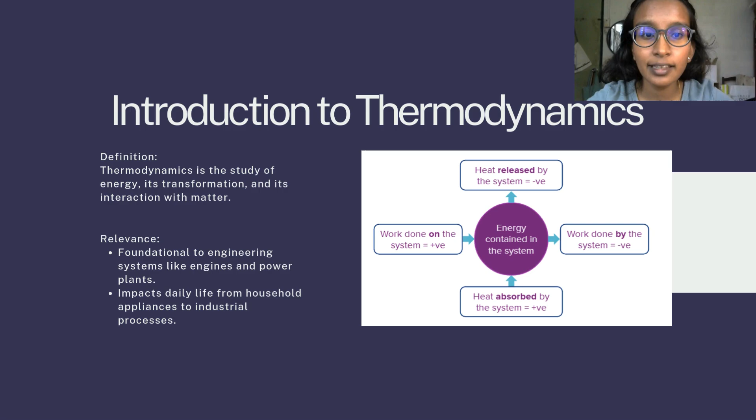Now, as mentioned, energy can take two main forms, which is heat and work. As you can see in the diagram on the right, it classifies energy contained in a system by specifying whether it is positive or negative. So, let's take work. Work done on the system will be positive, but work done by the system will be negative. And this is the opposite for heat, where heat that is absorbed by the system is positive, but heat that is released by the system is negative.

Now let's look at the first law of thermodynamics, which is the very core principle in this subject. The first law basically talks about the conservation of energy. It states that energy can neither be created nor destroyed, but it can change from one form to another. The basic principle of the first law is ΔE = ΔU + ΔKE + ΔPE. E refers to energy, U refers to internal energy, KE refers to kinetic energy, and PE refers to potential energy. Delta refers to the change that's happening in the system.

Now, usually kinetic energy is seen in a system that has any moving parts, and potential energy is seen in a system that has elevation. And internal energy is for systems that are considered as closed systems. Another equation correlated to the first law of thermodynamics is that ΔE of the system equals the sum of the difference in heat and the difference in work, also known as Q in minus Q out plus W in minus W out.

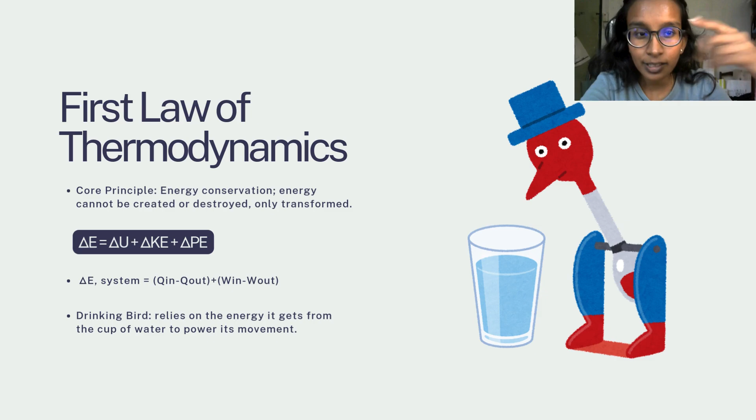As the liquid slowly travels upwards, the head gets heavier and heavier by the second, and it dips back into the water. But the tipping makes a bubble rise through the liquid into the bird's head, sending more liquid back down to the bottom and setting the little bird swinging back and forth, and thus this cycle continues as long as there's water in the glass. But it still needs water for it to do its thing. Once the water in the glass runs out, it won't be tipping back and forth anymore.

Now, there are four basic types of processes where the thermodynamic properties of a system, generally an ideal gas in some kind of container, can change according to the first law of thermodynamics. In each case, one property is held constant, either volume, pressure, temperature, or heat, while the other properties change. Variations on all these properties are used in all kinds of machines, especially heat engines or engines.

First, there is an isovolumetric process where the volume is held constant, usually because the gas is in a rigid container, while heat is being added or removed. A rigid container means the volume remains constant because it is not moving; there's no space for it to move. Now, as you add heat, the pressure of the gas in the container will increase, and so will its temperature. As you remove heat, the pressure and the temperature will decrease.

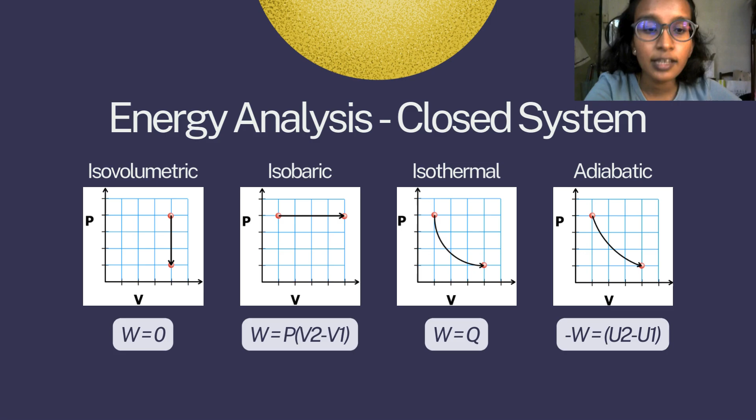So this means that the system can do work or have work done onto it. In fact, the change in the internal energy of the gas will be exactly equal to the negative of the work, which is why, as you can see below the diagram, the symbol in front of W is negative. And thus the formula for work is given as negative W equals the change in the internal energy.

Now let's take a look at the second law of thermodynamics. The second law of thermodynamics states that energy transformations are directional, meaning they occur in a way that increases the overall entropy of a system and its surroundings. Entropy, usually symbolized by the letter S, is a measure of disorder or randomness in a system, representing energy that is no longer available to perform useful work.

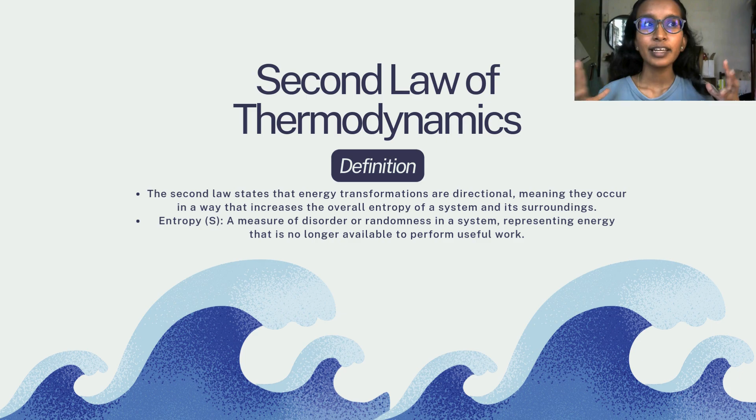The core concept here is that the entropy of a given system, or even our entire universe, at any given moment is constantly increasing, meaning that the state of matter in our world is constantly increasing in terms of chaos. There are four key concepts in the second law of thermodynamics.

The first is the Kelvin-Planck statement, which states that it is impossible for a heat engine to operate in a cycle and convert all heat into work without rejecting some to a low temperature reservoir. This sets a theoretical limit on the efficiency of heat engines and emphasizes the inevitability of energy losses.

This means that for a given cyclic system, for example, a power plant, efficiency can never equal 100% because there is heat flowing into the system, but there will also be heat that is being wasted. We cannot avoid the heat that is being wasted.

The second concept is the Clausius statement, which states that heat cannot spontaneously transfer from a cooler body to a hotter body without external work. This principle explains the need for energy input in devices like refrigerators and heat pumps, introducing the concept of irreversibility in thermodynamic processes. So, previously, the Kelvin-Planck statement mostly focuses on heat engines, which are known to be irreversible.

However, the Clausius statement focuses on systems like refrigeration cycles, which are known to be able to be reversed, meaning it flows in the other direction as well. So, the third concept is reversible and irreversible processes.

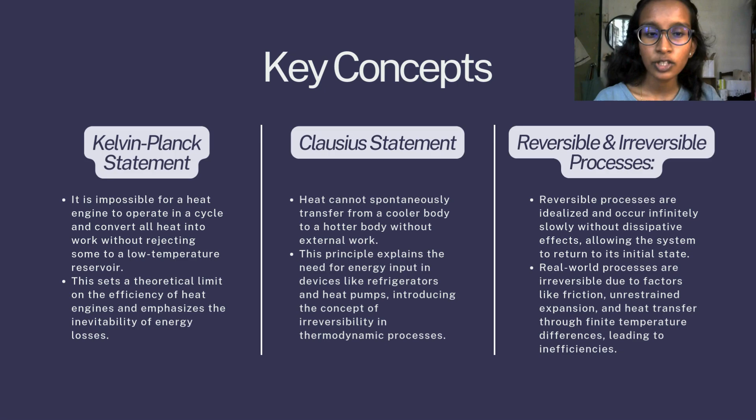So, reversible processes are idealized and occur infinitely slowly without dissipative effects, allowing the system to return to its initial state. In real world processes, irreversible processes are due to factors like friction, unrestrained expansion, and heat transfer through finite temperature differences, leading to inefficiencies.

The fourth concept, and what is perhaps known as the key concept in the second law of thermodynamics, is the Carnot cycle. The Carnot cycle is a theoretical model of the most efficient heat engine operating between two thermal reservoirs: the energy source and the energy sink. Basically, the Carnot cycle comprises two isothermal and two adiabatic processes, setting the maximum possible efficiency based on the temperature difference of the reservoirs.

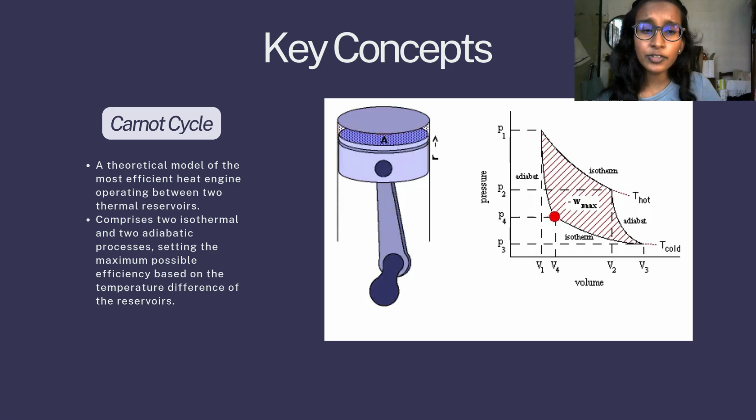So we can see some similarities between points 1 and 2 and points 3 and 4. It is known as an isothermal process because temperature is being held constant, whereas between points 2 and 3 and 4 and 1, it is known as adiabatic because there is no heat flowing into or out of the system. And all of these individual processes are reversible, meaning it can go clockwise or the other way around to achieve maximum possible efficiency.

So, in this assignment, the first part required me to analyze the first and the second law of thermodynamics, as I have done, and the second part of the assignment required me to apply these concepts to explain how a specific complex engineering system works.

And the engineering system that I've selected is an internal combustion engine, also known as ICE, which are found in most motor cars. So, allow me to give an overview on the internal combustion engine. The key components involved in ICE are the combustion chamber, piston, crankshaft, and valves. The energy flow within the ICE can be described as changing from chemical energy to thermal energy to mechanical work.

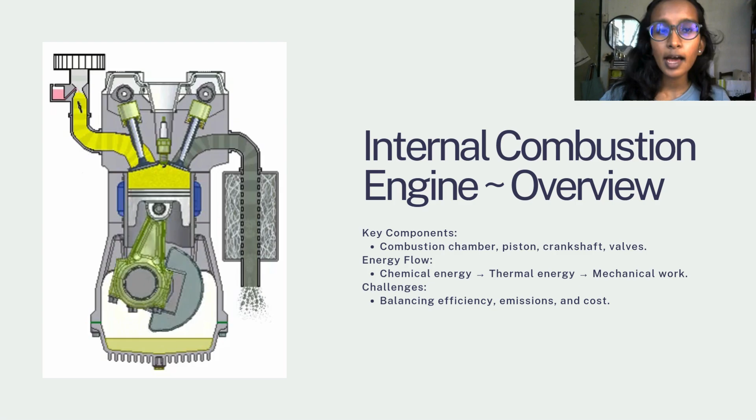Now, there are some challenges that are faced by an ICE, which include balancing efficiency, emissions that are produced due to the fuel that is used by an ICE, and the overall cost of an ICE. So, how does the ICE correlate to the first and second law of thermodynamics?

Let's take a look. The first law mainly focuses on energy balance, and how the ICE falls into place here is that the heat input from fuel combustion, the work output via mechanical motion, and the heat losses to the environment make up the overall energy balance, which is the key concept of the first law of thermodynamics.

And some of the engineering goals which correlate to the first law of an ICE are to minimize frictional and heat losses and to enhance fuel to work conversion. In doing so, it is able to achieve not 100% but maximum possible efficiency.

So, how an ICE correlates to the second law of thermodynamics is in terms of the impact of entropy. As we know, irreversible processes tend to reduce efficiency, and ICE is known as an irreversible process that can reduce efficiency because it has exhaust gases that represent energy and entropy loss to the system.

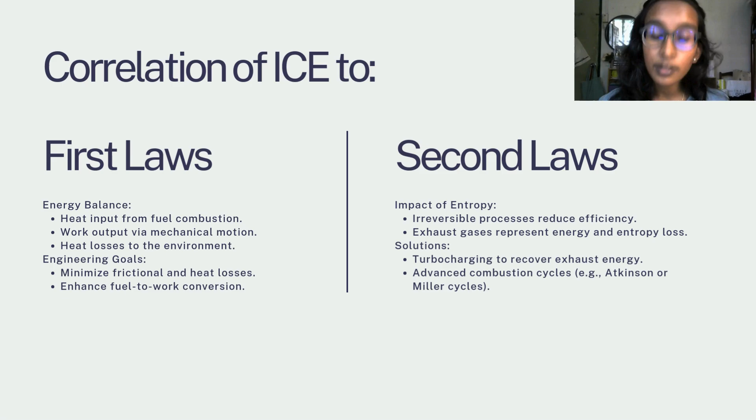Now, there are some solutions for this engineering problem. The first is turbocharging to recover exhaust energy, and the second solution is advanced combustion cycles, such as the Atkinson or Miller cycles.

Although most motor cars use an ICE, there are several conflicting priorities that take place in terms of concerns for the environment, concerns for energy, concerns of engineers, and back and forth. So the first concern is efficiency versus sustainability.

That is because higher efficiency of an ICE can lead to higher nitrogen oxide or NOx emissions, because in order to achieve higher efficiency, it has to use a certain specific type of fuel with a certain ratio, but these specific types of fuel tend to have higher harmful emissions.

The second conflicting priority or concern here is performance versus cost. Usually for an ICE, advanced materials and technologies are required to achieve a better performance of the ICE, but advanced materials and technologies tend to cost more.

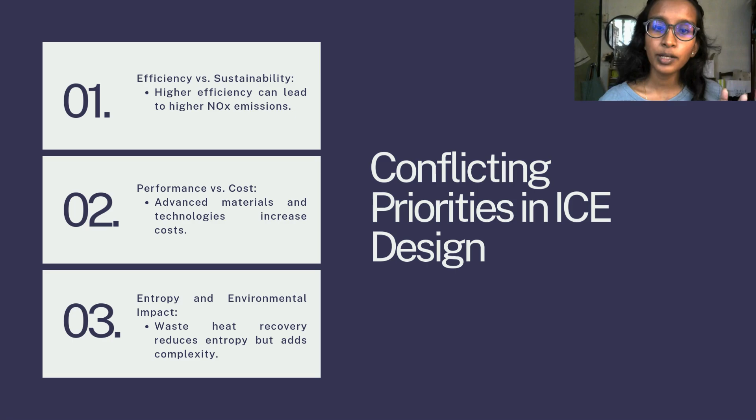And so the third conflict that is faced by an ICE design is entropy and environmental impact. As I mentioned earlier, entropy is basically energy that is constantly increasing in the system. Energy can be in the form of heat and work, and an ICE tends to have a lot of waste heat that it is producing, and waste heat recovery tends to reduce entropy, but it is known to add complexity to the system.

Now, to summarize everything that I've presented here, I have talked about the first law of thermodynamics, which governs energy conservation and transformation. I've also talked about the second law, which addresses entropy, directionality, and efficiency limits. I've also talked about the applications in an internal combustion engine, which are to optimize energy use and to manage inefficiencies and environmental impact.

And I've also discussed future directions in terms of sustainable and efficient engine designs that can leverage both thermodynamic principles in order to achieve maximum efficiency, reduced effects on the environment, and overall increased performance.

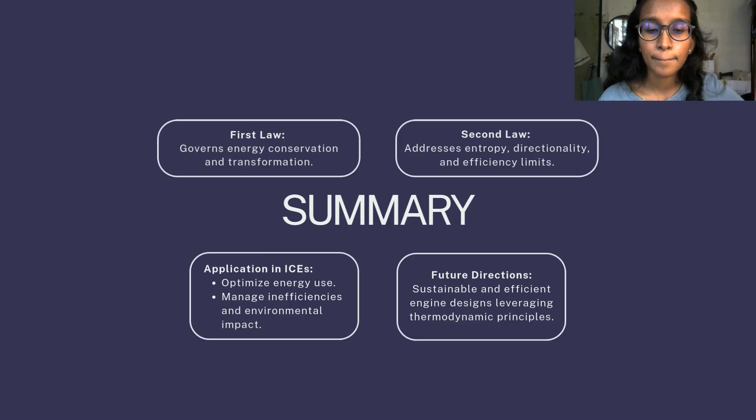So, to conclude everything, thermodynamics provides essential insights into energy systems. Internal combustion engines exemplify the practical application of the first and second law of thermodynamics, and continued innovation is necessary to address efficiency, cost, and environmental concerns.